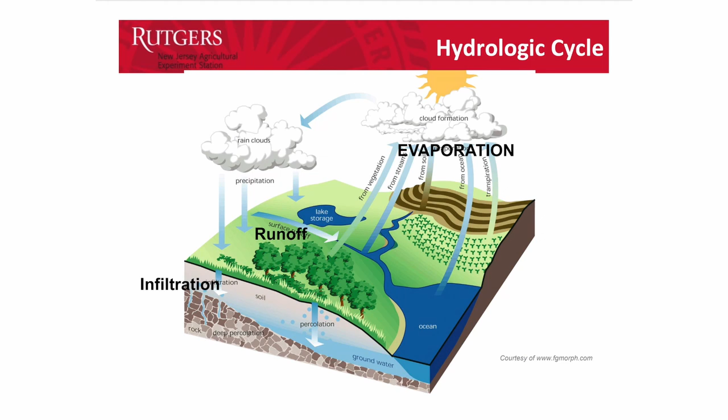So I mentioned Packanack Lake as a watershed. Do you guys know what a watershed is? Have you heard that term? Does anyone have any idea? You guys gonna be shy? Yes. Yeah, to me, a watershed is just like a drainage basin where something, a whole area of where rain comes down and drains into one area. Exactly. So I don't even need to show this video of Jim Cantore from the Weather Channel, because you pretty much nailed that. So basically, it's like a funnel.

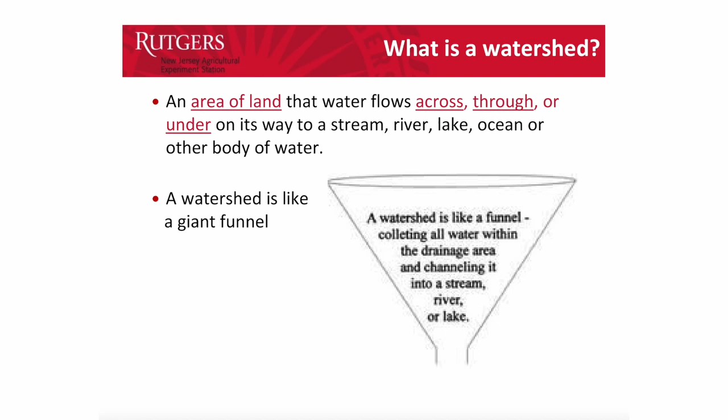It's taking all of the water across the whole watershed down into a receiving water body, which here happens to be Packanack Lake, and then Packanack Lake is part of the Passaic River watershed. And so all of the actions of all the homeowners in this watershed will impact Packanack Lake. I'm sure you guys have seen the algae blooms. You're aware of the water quality issues here in the lake and across all of the water bodies here in northeastern New Jersey. And so we're trying to improve that water quality.

We're trying to get everybody on board to care about their watershed and to care about Packanack Lake. And so I'm going to talk to you a little bit about all the things that you can do as homeowners and as a community to improve the water quality here.

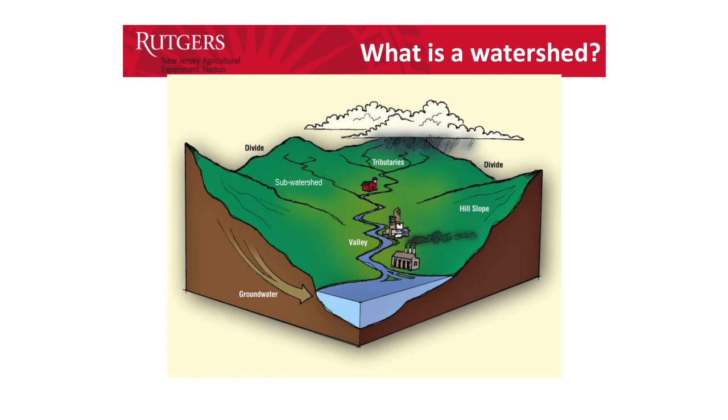Because all of the parts of the watershed all lead down to that receiving water. So everybody, no matter where you live, you're part of a watershed, and your behaviors and your actions on your own property will impact everyone downstream. Everybody lives downstream of somebody, and those behaviors will impact our watershed.

So these are just the different parts of the watershed, and so even the groundwater is part of the watershed. And so we just need to be aware of what we're doing, how all of our landscaping techniques are impacting the water body and impacting the water quality.

So all of those rooftops, those driveways, those parking lots, those roadways, all of those things are impervious surfaces that don't allow the water to infiltrate back down into our groundwater or down into our receiving waters. And so all of that is leading to flooding issues, leading to major runoff issues that, as you know, you live in Wayne, you've probably seen that localized flooding from all of that runoff when it rains.

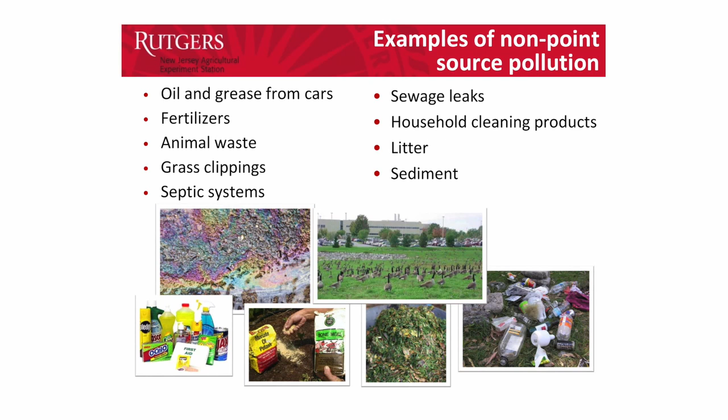So just to reiterate this, here are some examples of non-point source pollution. You can see how many geese are contributing to this. Do you guys know how much one goose can poop per day? Do you guys know? How many pounds of poop do you think one single goose? It's one. 1 pound of poop per day per goose. So I don't even know how many geese are in this picture. So that's a lot of phosphorus. That's a lot of nitrogen going directly into our water bodies.

So we need to manage this in a smart way. And obviously the geese population is a whole other issue. We could have a whole talk just on controlling geese, but just be aware that all of these things lead to contaminated water bodies.

Okay, but why do we care? Well, we care because we want our water quality to be good. Because when you have algae blooms, even the wildlife don't want to be there, but this impacts all of your recreational activities, all of your tourism, fishing, and then for up here in northern New Jersey, a lot of our drinking water comes from surface water bodies, so reservoirs, lakes, streams, and so we want to make sure that our water bodies are as clean as possible in terms of water quality.

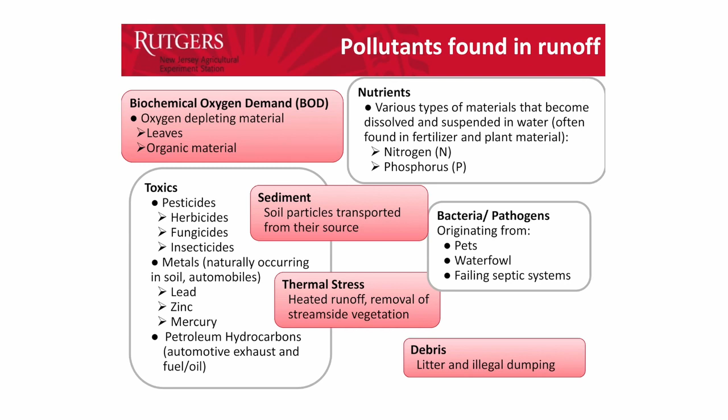Okay, I don't want to overwhelm you with all the science, but these are all the things that could possibly be in our runoff in terms of contaminants. And so I'm not going to read all of this, but just be aware that everything that we put down or that we could put into the environment can end up in our receiving body. So everything will end up here in Packanack Lake. It will end up in the Passaic River. And so all those pesticides, all those fertilizers, all of those metals, all of those things will end up down in our water bodies. And so we want to make a difference. We want to be as smart as we can in terms of our behavior and what we're doing to reduce the impacts here.

Okay, and so part of the problem is that we don't allow nature to do its part. All of our stormwater management systems are just connected impervious surfaces. So we have a rooftop, we have a downspout, it goes into the driveway, it goes out to the street, and then it goes to a retention basin or out into our water body.

So there's no opportunity for plants to uptake that water, to filter those contaminants out, or to improve that water quality. There's no opportunity for groundwater recharge. There's no giving that water back to our groundwater, back to our streams. And so sometimes all of the stormwater that's coming off of all of those hard surfaces is moving so quickly that it leads to erosion, and it really starts to break down the water body that's receiving it.

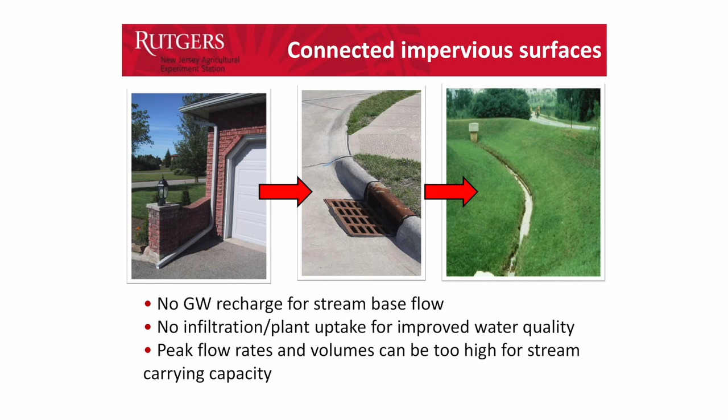Okay, so what can we do? That's why we're here. This is why your stormwater committee and all of your lake committees are meeting and working on all of these solutions. But what can we do as homeowners and as individual people? So one of the things that we can do is called low impact development. And all this is just trying to mimic what already happens in nature. Let biology and ecology do what it's supposed to do.

Plant plants that can uptake water, allow that water to filter through plants and through soil. Give that water a chance to be filtered, to be uptaken, to be cleaned before it hits our lake here and before it impacts all of our activities and all of our biological processes here.

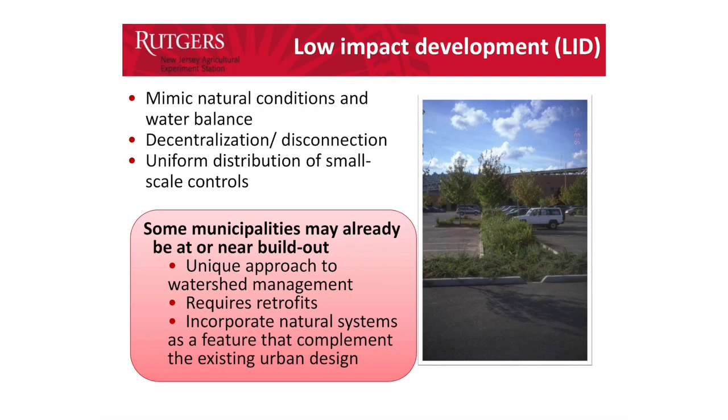These particular installations are often very aesthetically pleasing because you are putting plants, you're putting flowers, you're providing habitat for pollinators and for birds and all of those things that we want to promote in the environment. You're minimizing your site disturbance because, again, you are getting back to nature, getting back to the ecosystem level.

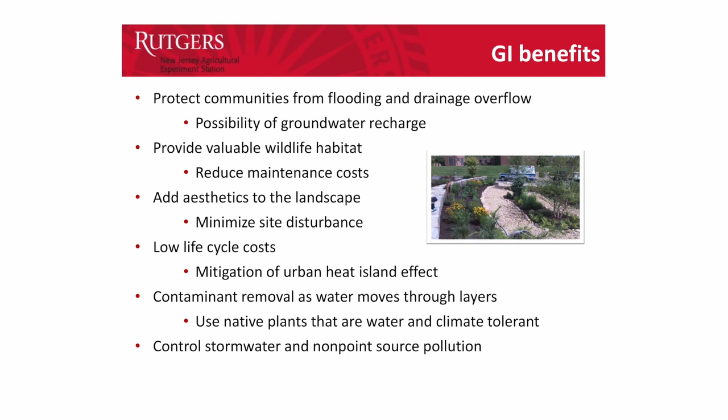You can also mitigate the urban heat island effect. So all of that concrete and all of that asphalt will actually increase the temperature of the surrounding area. So if you have green spaces, if you have trees, if you have plants, it will actually reduce the temperature locally at that area. And you can read all of these things. I'm not going to read all of them, but these are just some green infrastructure benefits and low impact development benefits that are helping us reduce stormwater and improve that water quality.

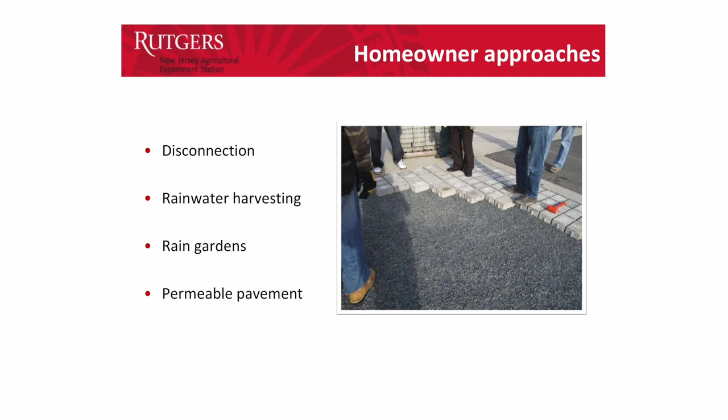Okay, so what can the typical homeowner do? So here are the 4 main things that you could do that are relatively achievable by the individual person, and we'll go through all of them. So let's start with disconnection. So if you have a downspout that is on your driveway, disconnection is just moving it from the driveway, which is a hard impervious surface, onto the lawn. If you can't do anything else, this is the simplest, most straightforward thing you could possibly do.

Just move it from the driveway onto your lawn to allow the soil and those turf plants, and even your garden, to soak up that water, to allow that water to filter through the different layers of the soil, and you are improving stormwater, you're preventing stormwater at the site. So you are reducing flooding, you're minimizing pollution, and you are soaking up that water right where it's being generated. So that water won't even make it down into the lake, into the water body.

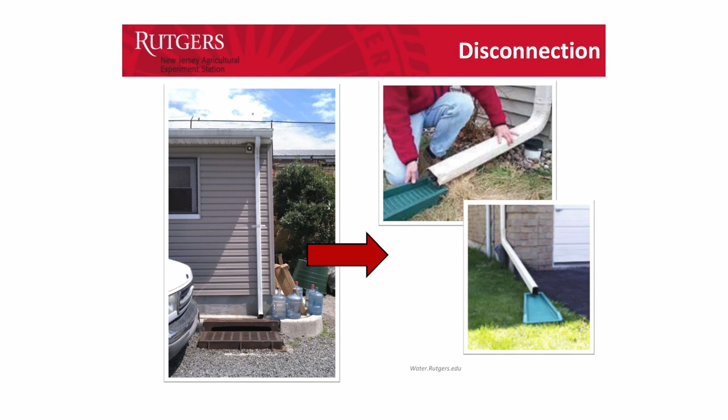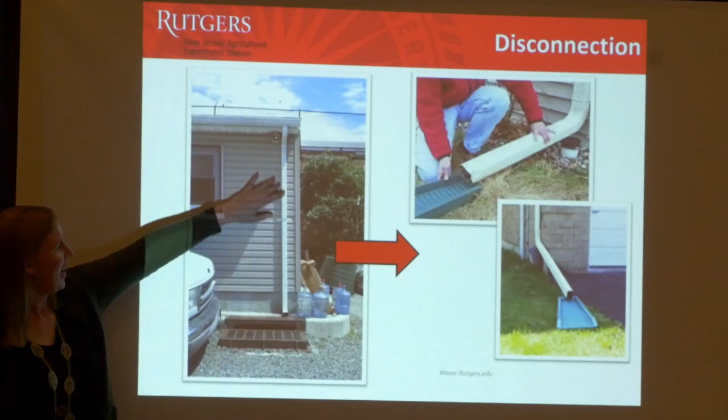And so you're reducing your impact, you're reducing the contamination load, and you are doing something that's literally moving the downspout 3 inches. That's it. That's all you're doing. So this is embarrassing that this particular rooftop has the runoff going directly into the storm drain. We don't want that to happen. We don't want the water to go right into the storm drain.

And this is embarrassing because this is a fairly forward-thinking environmental nonprofit in Newark. I won't tell you which one it is. But their downspout is directly connected to the storm drain, so there's no chance for interception there. But we don't want to do that.

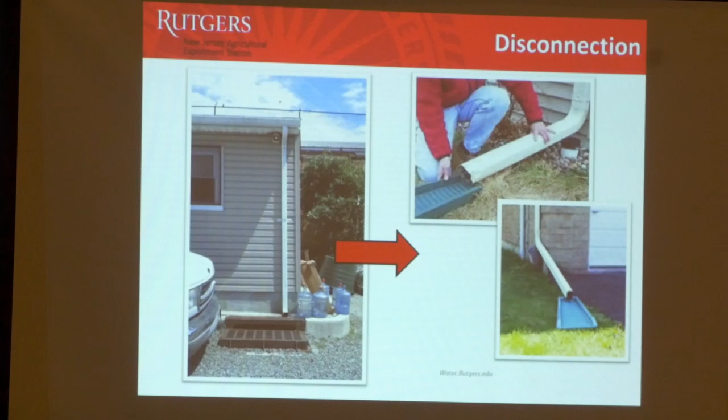We want to just break that connection, move that stormwater downspout from the driveway onto your grass. That's the easiest thing you could possibly do. Just allow that water to go into the soil, allow the turf to uptake it, or move it into your garden or whatever works for you, but get it off of that hard surface and off of the stormwater system.

Okay, so another thing you could do is harvest the rainwater. This will do all kinds of things. So not only are you reducing stormwater runoff, but you are not using drinking water to water your plants. You can irrigate with collected rainwater. It reduces your utility bills a little bit.

I mean, you're not saving a lot of water, but there's no reason to use drinking water to water your plants. Why are you using drinking water that's very high quality standard water to irrigate plants or your lawn? This can also prevent localized flooding. You're keeping the water out of your basement. You're directing it towards a different location. And then this also reduces pollution because you're preventing stormwater, again, at the source.

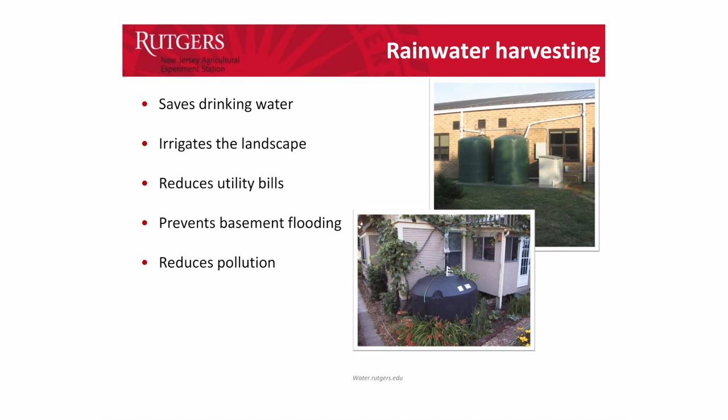Does anybody already have rain barrels or collect rainwater? Anybody? Nobody? Good, okay, excellent. So the thing about rainwater harvesting is that you need to actually use the water. You need to make sure you're using it before the next rainstorm, right? Which when it rains almost every day is a problem.

Again, I was telling someone before the talk that the average rainfall for New Jersey is about 44 inches per year. In 2018, we got 64 inches of rain. So that's about a 50% increase in just a single year. So hopefully that's not a trend. Hopefully that was an anomaly because we really don't want it to rain every single day.

But collecting rainwater is a great resource. It kind of changes that mindset of out of sight, out of mind in terms of stormwater, and it thinks of rainwater as a resource rather than as a nuisance. So just keep that in mind. So another thing you could do is to install a rain garden. Have you guys heard of rain gardens?

Good. So a rain garden is simply a shallow depression that has specific plants installed in it that is designed specifically to capture stormwater. So you're just trying to capture and hold that stormwater on site just long enough to keep it out of the stormwater system and to allow that water to infiltrate down into the soil and to prevent any generation of runoff that could run off down into your lake here, into the receiving water body.

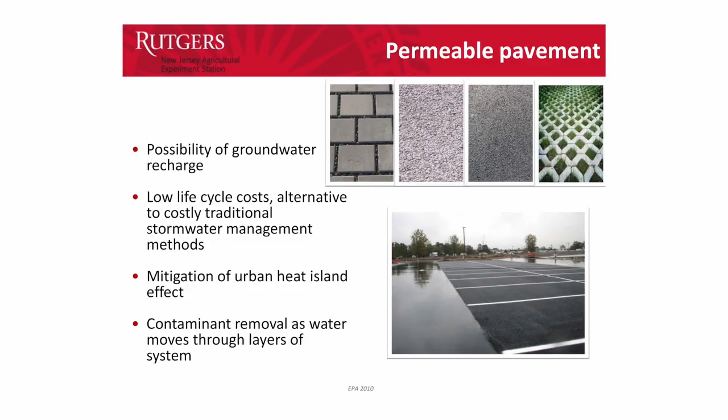And then here, just for your visualization, we have a traditional asphalt driveway, and then this is porous asphalt. So you can see how wet this is on the traditional side, and then here is porous asphalt that is letting the water run through it. So again, this is a little bit more advanced.

Permeable pavement will always cost more than traditional pavement because it's an entire stormwater management system, but it has all of these benefits and it has a much longer life cycle than traditional asphalt. So consider it, but you will need an engineer and you will need a professional company that knows what they're doing when you're installing this kind of system. So keep that in mind. Don't do it under your own supervision. Make sure that you have a licensed engineer helping you with permeable pavement.